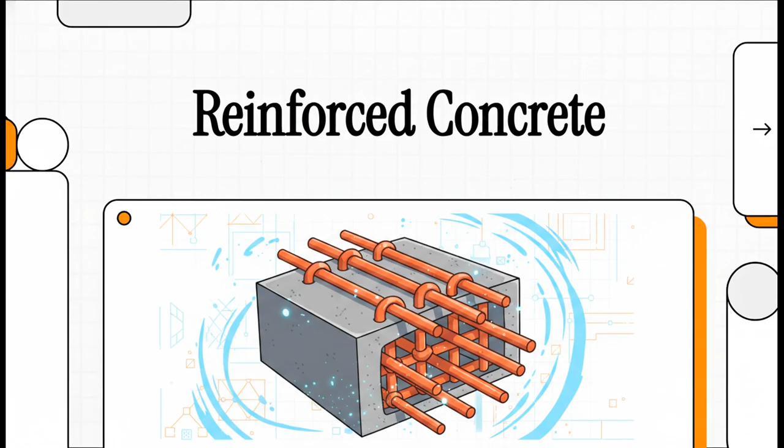Let's get into it. I mean, it's a good question, isn't it? You look at these massive buildings, these huge bridges, and they just seem so permanent. But how? What's the secret sauce? What keeps this stuff, which we all kind of know is brittle, from just snapping under all that pressure?

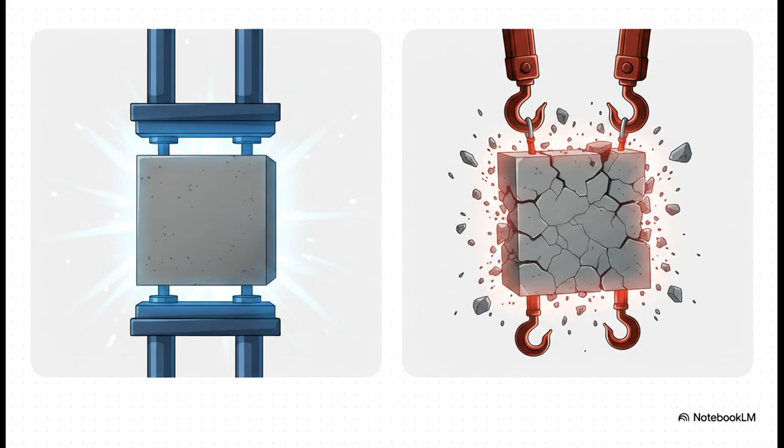Well, it all starts with this weird contradiction. See, concrete has a superpower. It's a champion at being squeezed. You can put immense weight on top of it, that's called compressive strength, and it's totally fine. But it has a kryptonite. The second you try to pull it apart, apply what engineers call tensile force, it's terrible. It just cracks and fails.

So, you've got this material with a massive flaw. How on earth do you build a skyscraper with it? Well, you find it the perfect partner. And we're not just talking about mixing stuff together. This is like a perfectly engineered team-up of total opposites. And that is what we call reinforced concrete, or RCC.

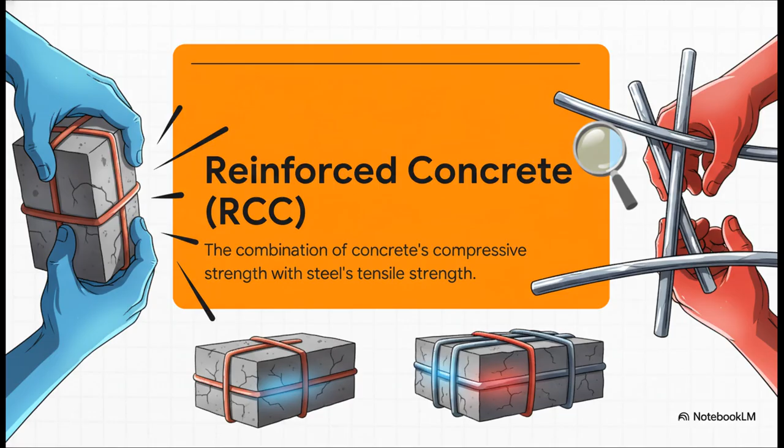The idea is so simple, it's brilliant. You take steel bars, you've probably heard of them as rebar, and you put them right inside the concrete. So now the concrete does what it's great at, handling all the squeezing, and the steel, which is amazing at being pulled, handles all the stretching forces. Together, they become this incredible supermaterial.

But here's the real magic, the scientific reason this whole thing even works. It's all about this one little number, the coefficient of thermal expansion. What does that mean? It means when things get hot or cold, both concrete and steel grow and shrink at almost the exact same rate. Think about that. If they didn't, they'd literally rip each other to shreds from the inside. This is like the secret handshake of the materials world.

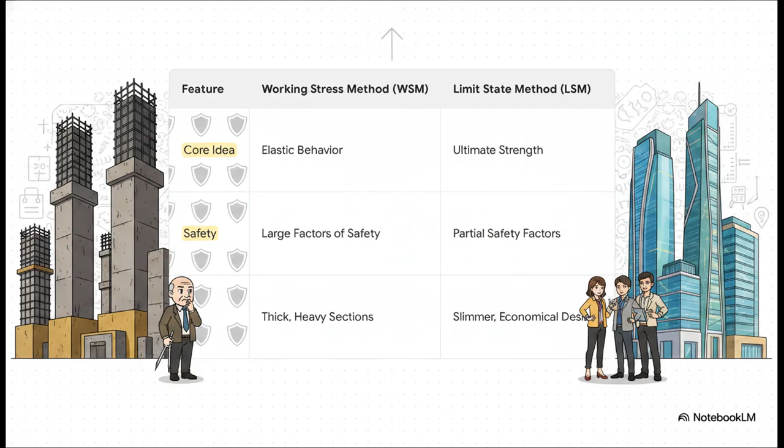Okay, so you can't just chuck some steel into wet concrete and call it a day. The way engineers design these things is incredibly precise, and that thinking has really changed over the years. The old way of doing things was called the working stress method. It was super cautious, kind of overcautious really, used huge factors of safety, which meant you ended up with really thick, heavy, and kind of clunky structures. But today we use something called the limit state method. It's much smarter. It looks at the ultimate strength of the materials and uses these more fine-tuned partial safety factors.

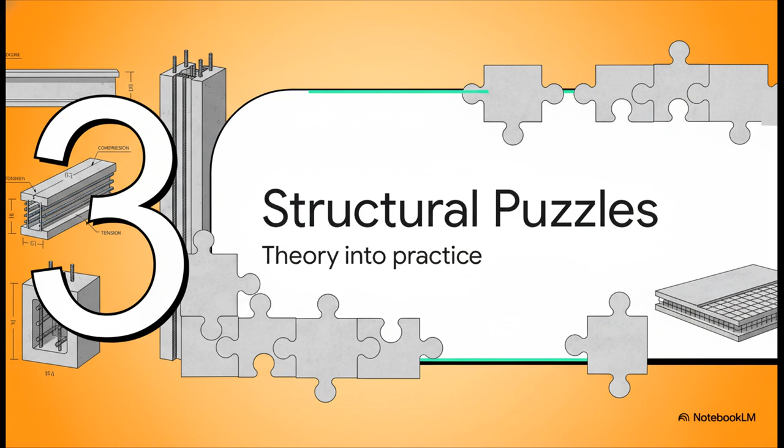The result? We get slimmer, much more economical buildings that are just as safe. So, that's the big picture theory. But where it gets really interesting is how you apply it to all the different parts of a building. Every piece, a beam, a column, a floor slab, it's like its own little structural puzzle. Let's take a look at how engineers crack the code.

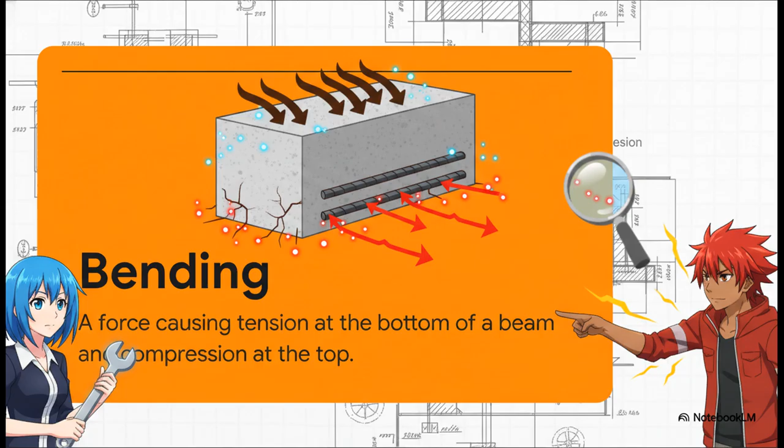Let's start with a simple beam. You put weight on it in the middle, what happens? It wants to sag, right? But that simple sag is actually two different things happening at once. The top of the beam is getting squeezed together, that's our old friend, compression. But the bottom of the beam is getting stretched apart, and what's that? Yep, tension, concrete's ultimate weakness.

So how do we fix this? It's a 1-2 punch. First, we put the main steel bars, the long ones, right at the bottom of the beam, exactly where all that stretching is happening. Problem solved, right? Well, almost. There's another nasty force called shear that tries to create these diagonal cracks. To stop that, we add these vertical steel loops called stirrups. It's so cool. Every single piece of steel in there has a very specific job to do.

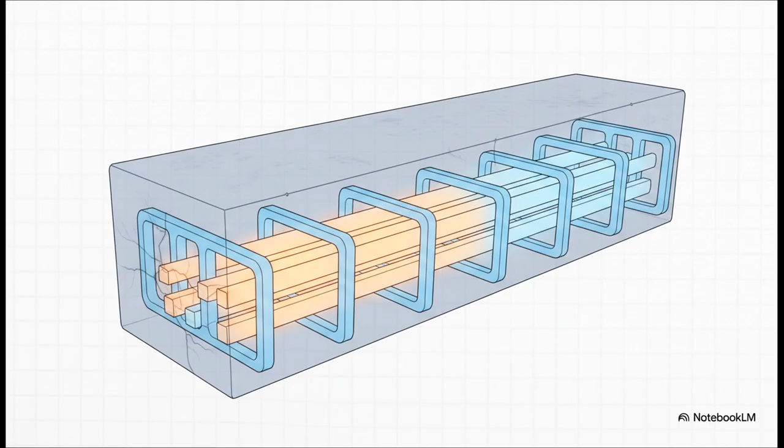Now, what about the floors and ceilings? Those are called slabs, and they deal with similar forces.

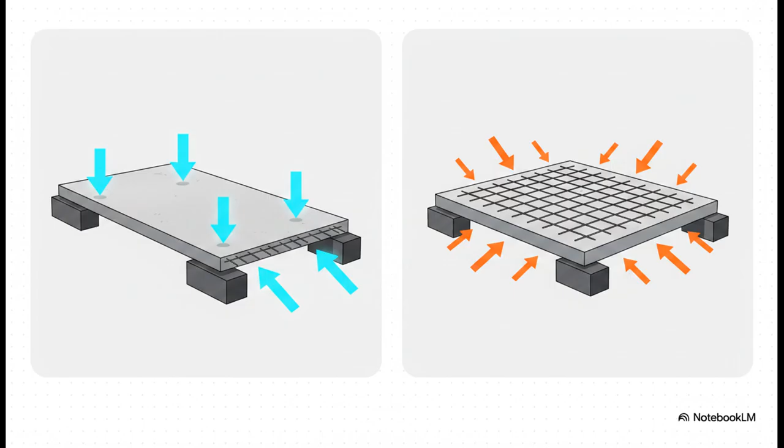But how we design slabs all depends on their shape. Here's a simple rule of thumb: if the slab is long and skinny, like if its length is more than double its width, the load basically just goes in one direction. We call that a one-way slab. But if it's more of a square shape, supported on all four sides, the load spreads out in two directions. That's a two-way slab.

Okay, let's talk columns. Their main job is just to get squeezed, which concrete is great at. But there's a catch. Think about what happens if you squeeze a plastic straw really hard, it bows out to the side, right? The same thing can happen to the long steel bars inside the column, they can buckle outwards. So to stop that, engineers wrap these smaller steel rings, called lateral ties, around the main bars to keep them from ever bowing out.

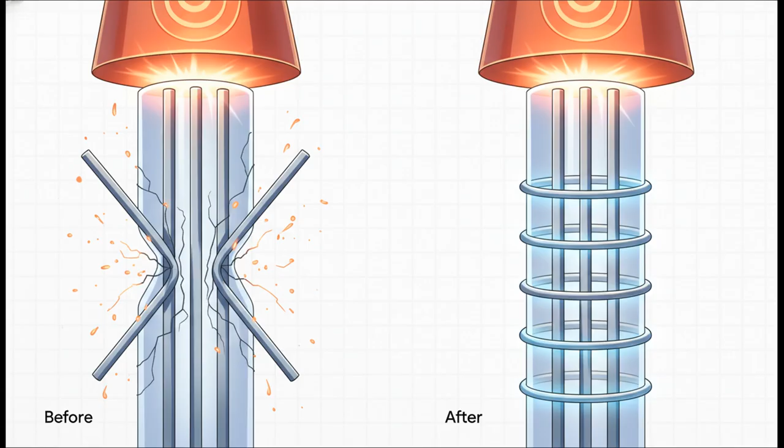And what's holding this whole thing up? Way down at the bottom, you've got the footing. Think of it like the building's snowshoe. It's this big, wide base that takes all the weight from a skinny column and spreads it out over a huge area of soil, so the whole thing doesn't just sink.

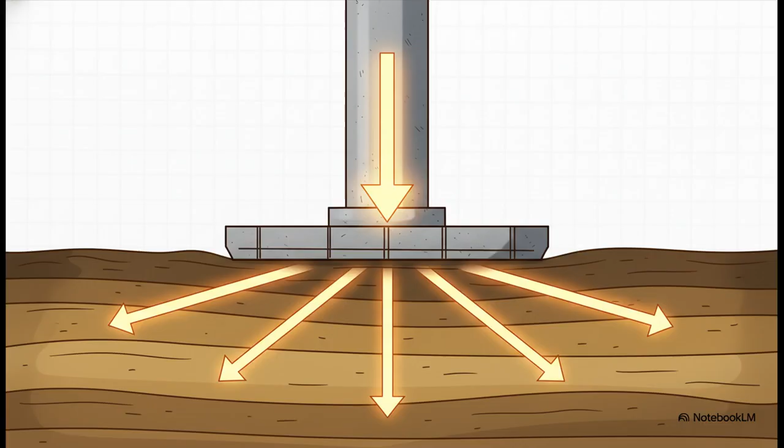But wait, there's one more crucial piece to this puzzle. All that steel is fantastic, but it's vulnerable. It can rust, so it needs a shield to protect it from water, air, everything. And what's the shield? It's the concrete itself. This protective layer has a name, clear cover. It's simply the thickness of concrete covering the steel.

And check this out, the amount of cover changes depending on how exposed the part is. A floor slab safely inside a building only needs about 20 millimeters, but a footing sitting down in the damp soil needs a much thicker coat, about 50 millimeters, to make absolutely sure that steel never ever rusts.

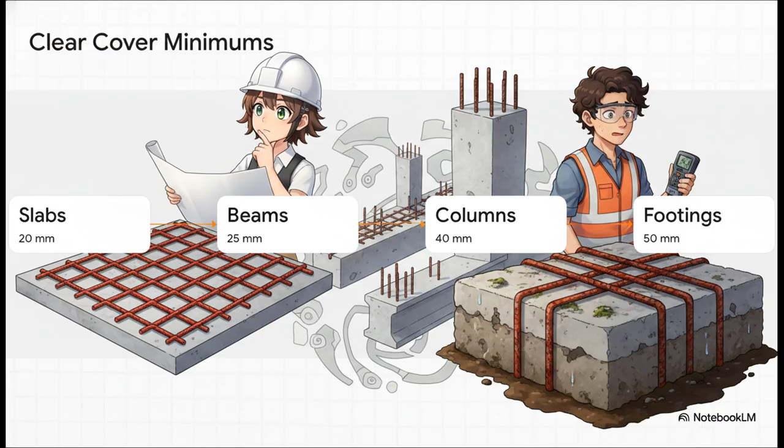All right, we've covered a ton of ground, from the basic theory to how it all works in practice. So, you think you've got it? Let's do a super quick quiz to find out.

Question 1: in an RCC beam, what's the primary job of those vertical loops we talked about, the stirrups? Are they there to resist A, bending, B, torsion, C, shear force, or D, compression? Think about it for a sec. And the answer is C, shear force. The big bars at the bottom handle the bending, but the stirrups are there specifically to stop those diagonal cracks from shear.

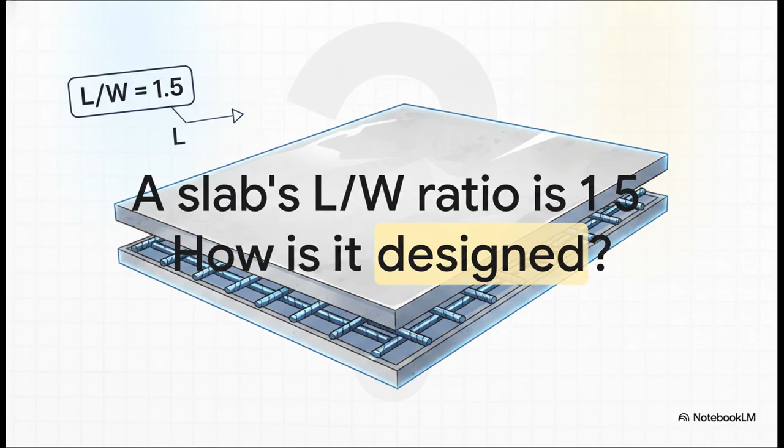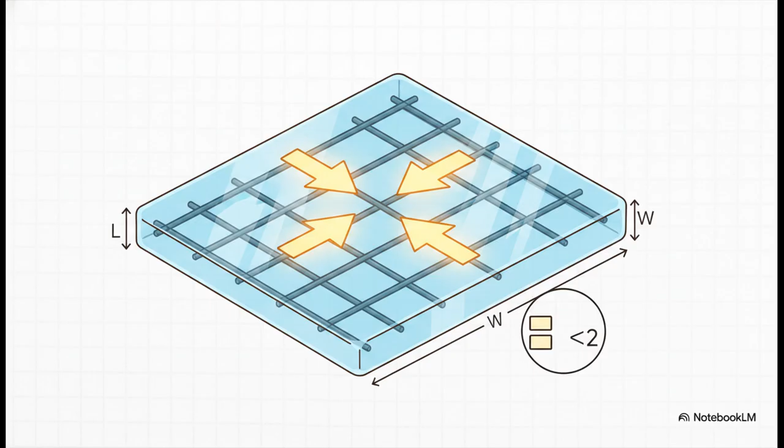Okay, next up. Picture a concrete slab, it's supported on all 4 edges, and its long side is 1.5 times its short side. So is that designed as A, a one-way slab, or B, a two-way slab? The answer is B, it's a two-way slab. Remember that simple rule? If the length divided by the width is 2 or less, it's a two-way. And 1.5 is definitely less than 2.

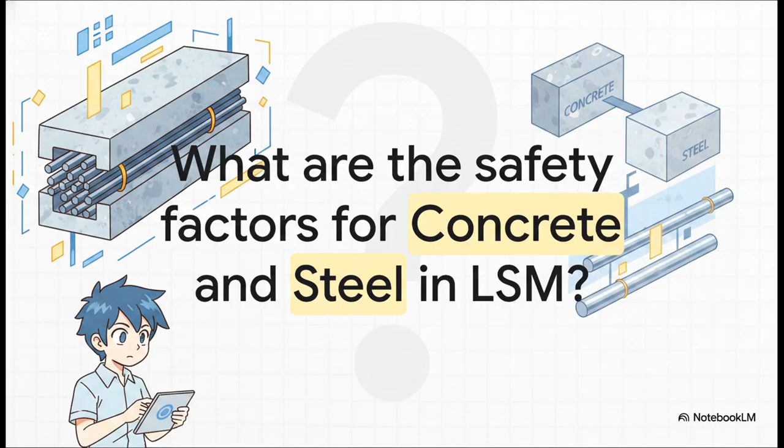Nicely done. All right, last one, this is a bit more detailed. When we're using that modern limit state method, what are the partial safety factors we use? Is it A, 1.5 for concrete and 1.15 for steel, B, the other way around, or C, just 1.0 for both? The correct answer is A: it's 1.5 for concrete and 1.15 for steel.

And there's a great reason for that. Steel is made in a factory, so its quality is super consistent. Concrete is mixed right there on the job site, so there's a bit more variability. That extra bit of safety factor just accounts for that uncertainty.

Makes sense, right? So there you have it, the incredible secret partnership between two totally different materials that makes our modern world possible. Seriously, the next time you're walking under a bridge or standing in a tall building, take a second, look around, because now you know the invisible engineering that's holding it all together. So my question for you is, what are you going to spot in the world around you today?